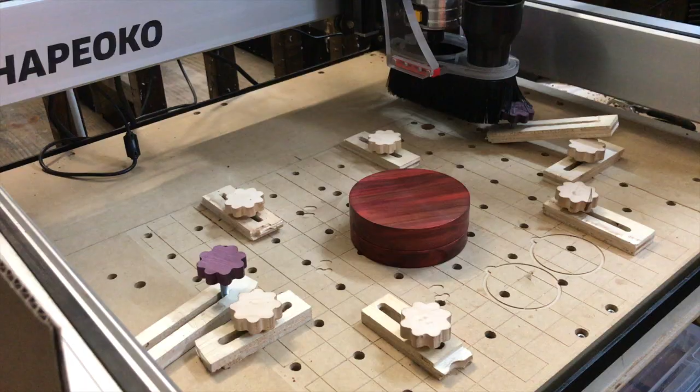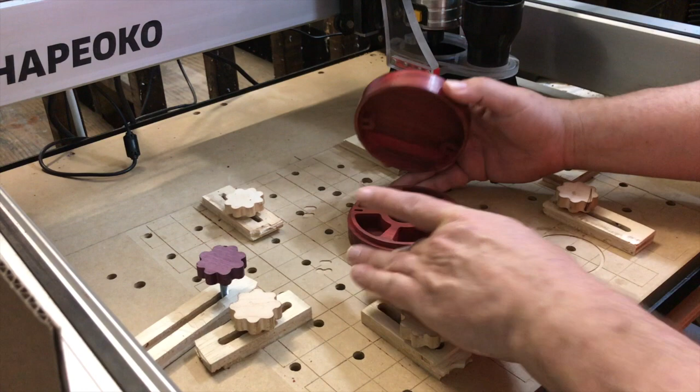This will be part 3 in the box series of videos. This time I wanted to cover a little bit on how to use the node editor, how to use subtraction, and also how to position magnets to hold on the lids of these boxes. So this time what we're going to create is a dice box for Dungeons and Dragons, because that seems to be what all the cool kids are playing these days.

You can also use these for jewelry boxes or for any other kinds of things. And I'll show you how to get the magnets positioned in here, mount those, and how to get these little pockets cut and spaced out correctly. And then in the end, we'll come back and we'll carve something really pretty on the top.

So with my original design, I knew I wanted something in a circular box. I've dealt with ones that are about this size before. This is about a little over 4 inches. It gives me a big enough box, but it doesn't feel huge and clunky. Each one of these is a ring approximately 1/8 of an inch in from the other. This will be our outside diameter here, our inner lip, and then the inside piece of the box here.

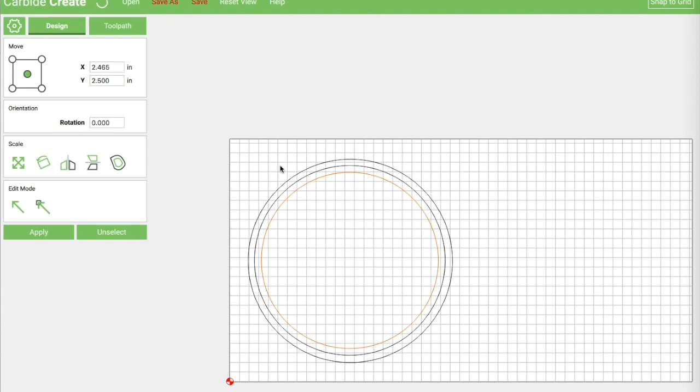Now, I knew I wanted 6 compartments in here, so I could literally just take these 1/4 inch slices like this and do them 60 degrees off from each other. And that gives me 6 compartments. And I wanted 6 compartments because there are 6 types of dice in D&D.

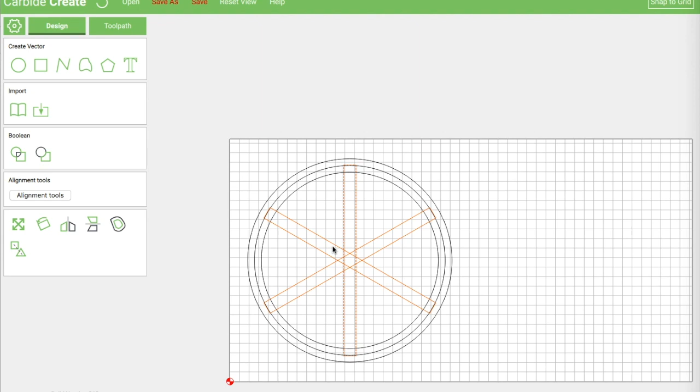I looked at this a couple of times and I felt like these were still a little small in here and there was a lot of wasted space in this area. So that's when I decided what I wanted was 5 compartments around the edge and then a circular compartment in the middle, so that I didn't end up with this wasted space here. What we're going to do now is I'm going to go ahead and kill these 2 right here. Delete those.

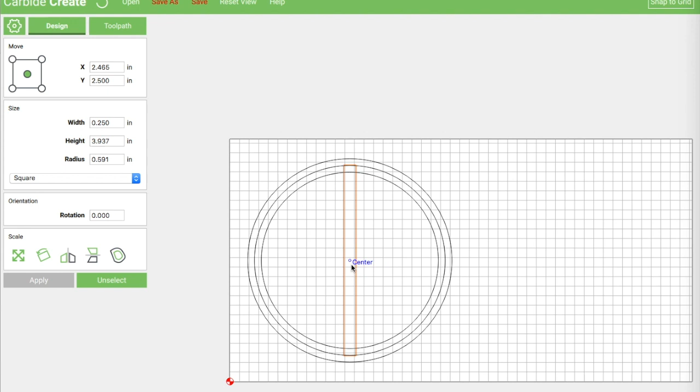Alright, so now I've got a 1/4 inch walled piece right here. I know that this is 360 degrees, good old high school geometry coming in handy. So if I'm going by 5 compartments, I want these to be on 72-degree angles going around here. So I take this one and I'm going to copy it.

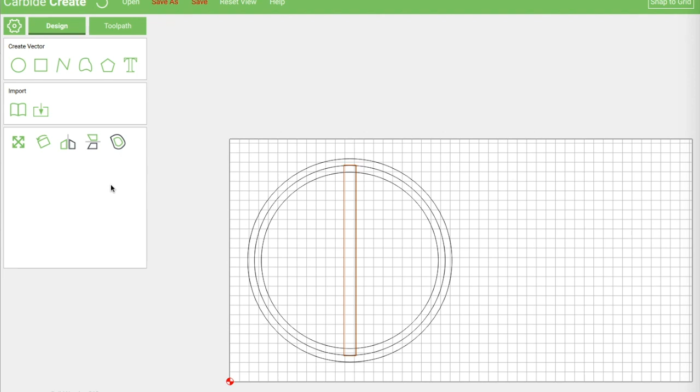Now I want to make sure that these are all spaced correctly. And one of the things I can do, you notice here I see these little points, midpoint and center. I can take the center of this one and drag it and it'll lock to the center of that one. And that way I know they're exactly where I want them to be. And then I can just take this one and make it 72 degrees from that one. And I know my second wall will be here, right? And I'm going to keep doing that until I've got my 5 compartments.

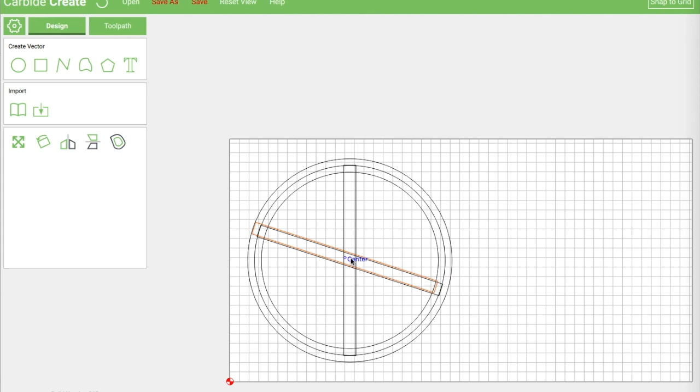Okay. So now you notice we've split this into a lot more than 5, but really what we want is every other one. This one, this one, this one, this one, and so on. But we also want these shorter. We don't want them going all the way across. So to start with, I'm going to use that fact that we can lock these nodes together to line up all of our stuff, right?

So I'm going to lock this one first. I'm going to copy it. And I'm going to go ahead and center it. And then I'm going to make it a little bit shorter. So we're going to make these about 1.25, 1.5. So now I'm going to take the midpoint here at the top and I'm going to lock it to this one, right? So now I know that's in the right spot. I'm going to delete this guy. Don't need him anymore. And I'm going to go on to the next one.

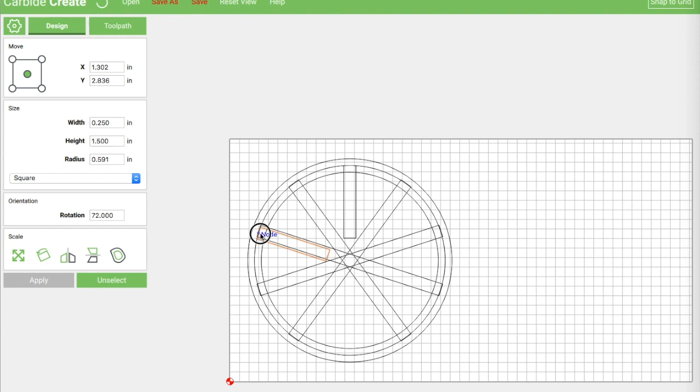Remember, the next one's not this, it's this one. So do the same thing, copy, center it. 1.5. All right, grab my midpoint. And I can get rid of this one. So this makes sure that each of these is in the right place and at the right angle.

Okay, so now I've got my 5 walls right here, and this gives me a nice big open space up here, and I'm going to use the space in the middle as well. But for right now, what I want to do is I'm going to go ahead and subtract these out so that I end up with the inner walls that I can cut.

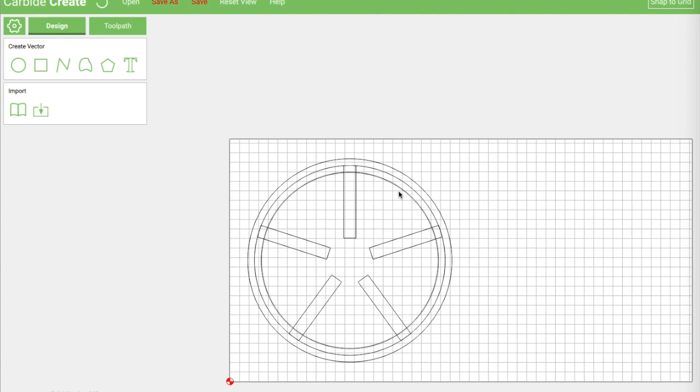So start by selecting my innermost circle. I'm going to break these apart. My innermost circle, select this guy because he's got his little dotted line around, so we're going to cut him out. We use subtraction, boink, and now he's out. And we're going to do the same thing with all the rest of these.

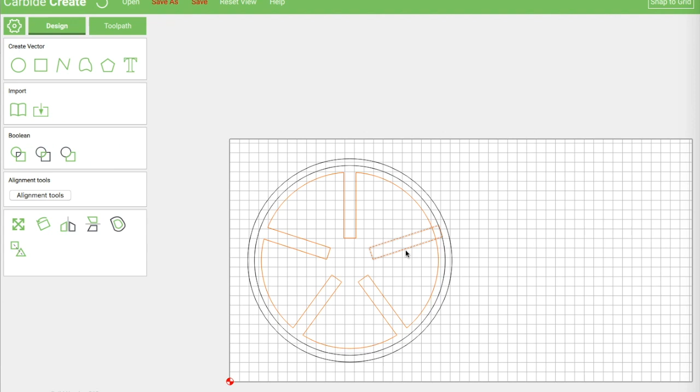Alright, so now we've got this kind of really odd shape here. So the next thing I want to do is put our circular pocket here in the center. So I'm going to go ahead and take our circular vector, I'm going to lock to the center. And I'm going to make this one about 0.9 diameter. Radius, sorry. Keep forgetting radius versus diameter. Then I'm going to take this, I'm going to do an offset. 0.25. Alright, and that'll be our center pocket.

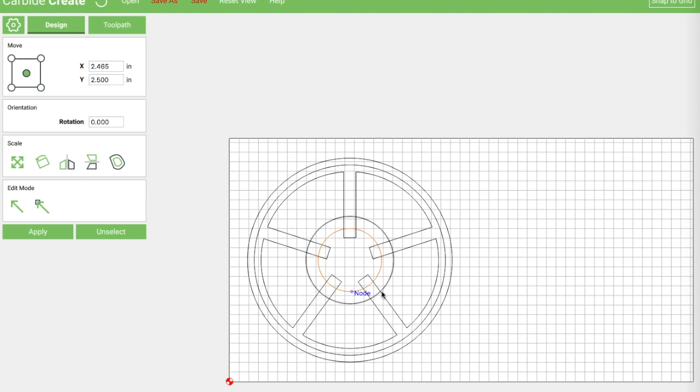Right? So now I want to take this crazy shape and I'm going to subtract out our center. Use the subtraction tool, bang. And now we've got our pockets and our center piece right there. So we should be good to go on that. The next thing we want to do is add the magnets in.

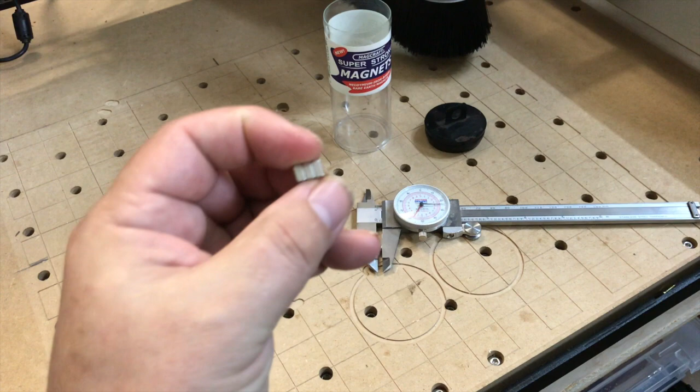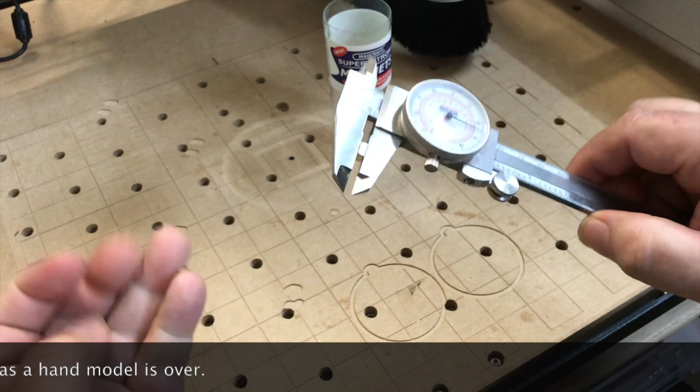Okay, so the magnets we're going to use are these little guys. They are made by a company called Magcraft. You can order them online from Highland Woodworking. They are about 1/4 of an inch square, and they come out to be exactly 1/8 of an inch thick. So we'll need to take that into account when we're cutting the slots for these.

Okay, so now that we know the size of our magnets, let's get those fitted in there. Go ahead and choose this. And I want to make this 0.128, a little bit bigger than the 1/8 inch of the magnet. 5, and I'm going to fill it. So now I've got this. And these are the size for my magnets, right?

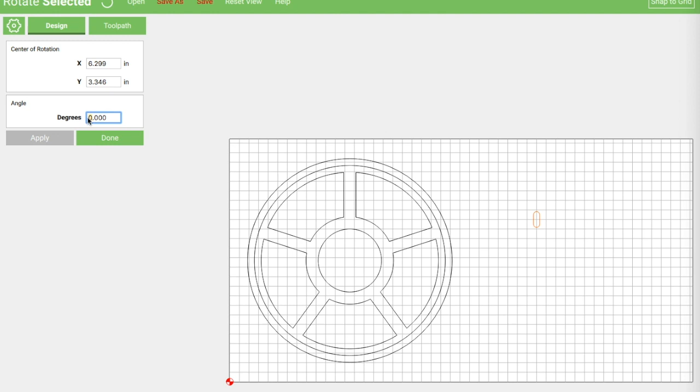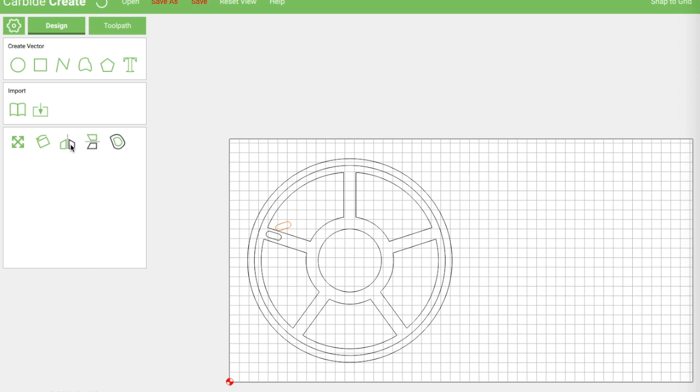Now I'm going to go ahead and make this one 72 rotation. And then I should be able to fit it right over here. I'm going to turn off snap to grid so it doesn't try and pull it in one particular direction. Okay, so I'm going to put that one there, copy, and flip. And this one can go over here.

And I find sometimes it's helpful to zoom in on these. Positioning. That's close to center. And this is close to center. Okay. Now you'll notice that there's not a lot of material here. So this could prove problematic when we're trying to put those magnets in. You can wind up busting out the wood.

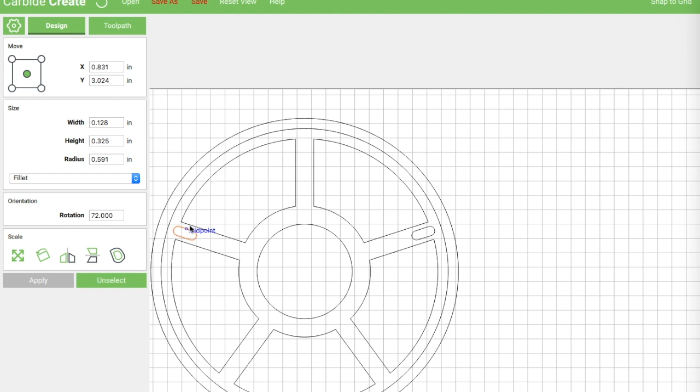You don't want that. So what I want to show you next is something called a node editor, which is built in. I can come over here and I can select one of these. And now I get to see all the nodes that make up that shape. And I can zoom in and I can select a node. I can tell it delete. Notice that gives me a little more room. Delete. Delete. So now I've got a little more space.

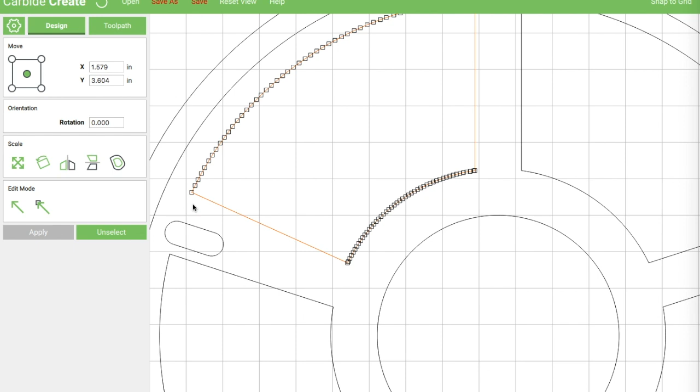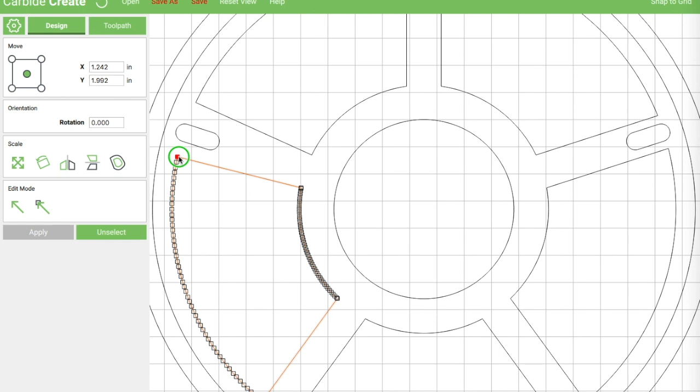If I reset my view, okay, that is cool. That gives me plenty of space. And I'm going to go ahead and do the same thing to this one. Delete. Delete. Delete. Alright, unselect, reset. Okay, so now I've got a little bit of a wider shape.

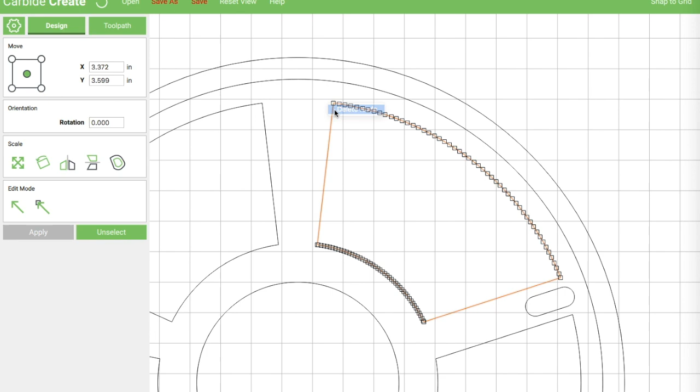It doesn't detract too much from the room that I have in the shell, but I think I want to make all of these consistent all the way around so that they've kind of spread out at the top like this one. So let me go ahead and do that. So now I've got this, and that gives us the basic shape for our bottom piece. Now we want to create our top piece.

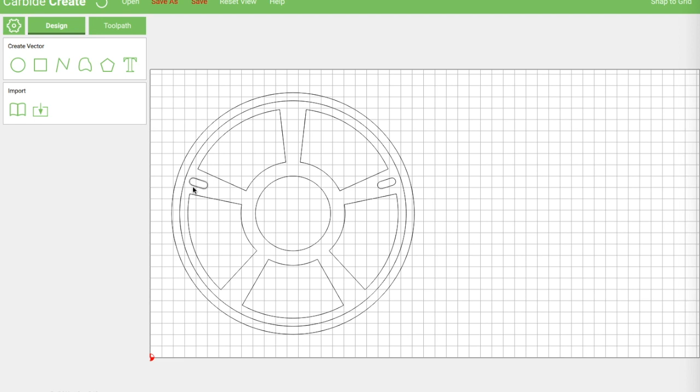The critical thing to remember about the top piece is you want these magnets to line up exactly. We don't necessarily need these pieces right here, so we're going to make our top piece completely open. So I want to select these two, the magnet, and this other magnet. All right, now I've got those. Copy. I'm going to group them.

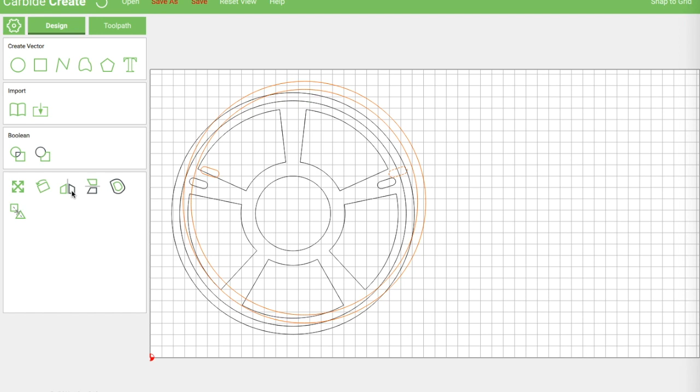And the other thing that's important to remember to do is flip them. I want to go ahead and flip them this way because remember our box is going to sit together, right? And that ensures that those magnets should line up when they come together. So now what we need to do is go ahead and break this apart again.

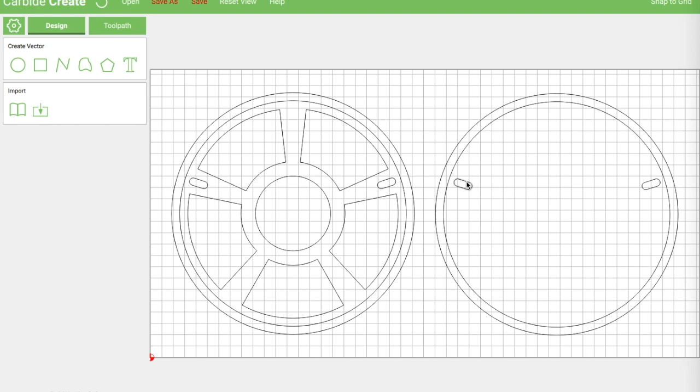I'm going to select this guy. So this is our inner wall, right? This should line up with this piece over here. But I need some place for these magnets to fit in. So what I'm going to do is I'm going to come here and I'm going to say I want outside. Yeah, I can live with that. Okay, so I want to do that, and then I want to do the same thing for this one.

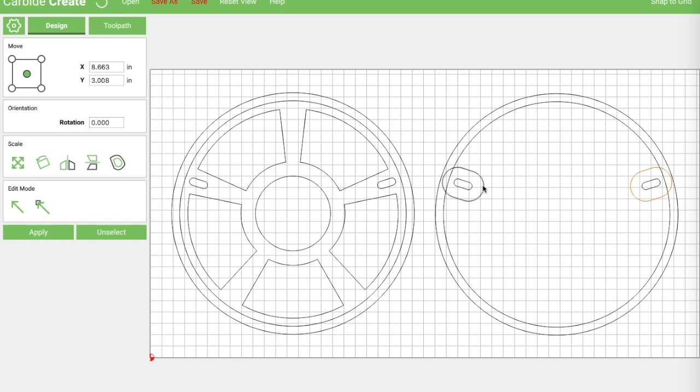Okay, so now I've got these pieces here that allow me to put some wood there. Next thing I'm going to do is I'm going to duplicate this guy. You'll see why in just a second. Copy. And now I need to cut this guy out. Subtract. And this guy out.

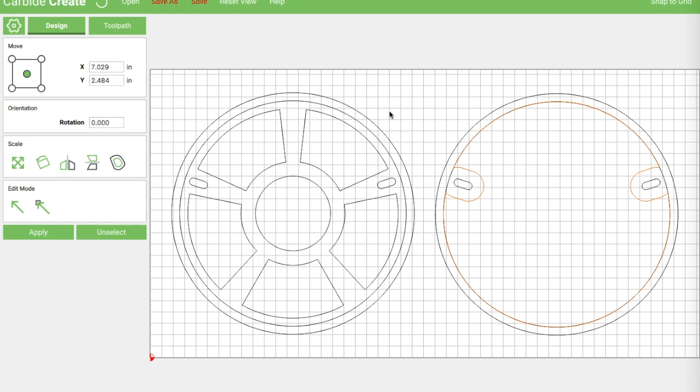Okay. So now I've got a complete outer ring here, right? This one goes all the way around, and that'll be our inner lip. And then slightly down from that, we're going to cut this whole area out around these as our pocket for underneath.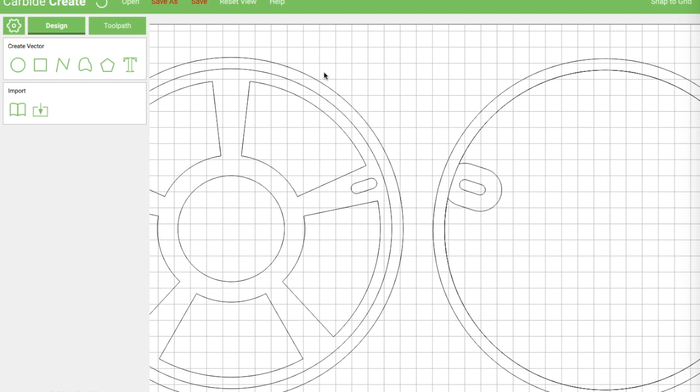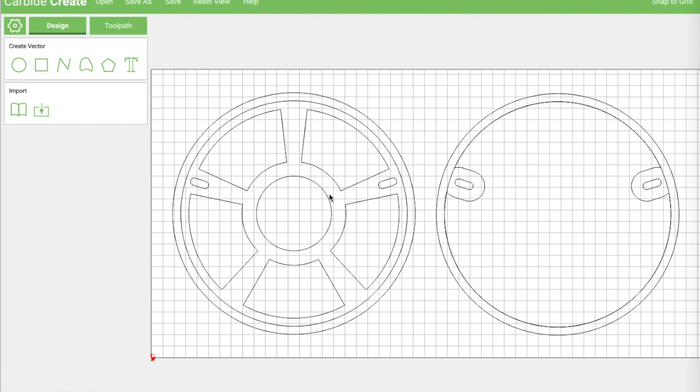Okay, so the next part is figuring out our tool paths. This is going to be a little tricky because of two things. For one, we're going to use an 1/8 inch end mill to cut these magnets out, but for everything else, just to save time, we're going to use a 1/4 inch end mill. So we need to do a tool change in between some of these things. We also need to be really careful on our order of operations so that we don't have to change tools back and forth. So the first thing I want to do is cut the magnets.

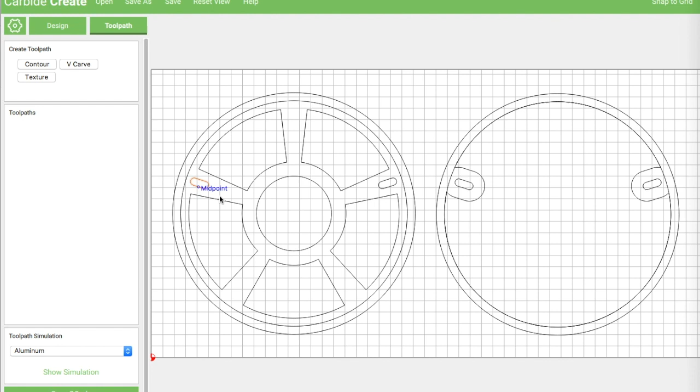And in order to show you how this works, I'm probably going to flip back and forth a little bit between the box itself and the design work. So we know our magnets are about 1/4 inch deep, and I'm going to go ahead and cut these two first. And we're going to do 1/8 inch end mill. Leave the speeds, they're fine.

And we're going to cut these just a hair deep, so 255. That gives us a little bit of wiggle room. And they should fit in there just nice and snug. And we'll leave those inside. And I'm going to call this bottom magnets.

Okay. Now, as we said, for our top magnets, these are going to be in a slightly different plane, right? So they're going to be further down. They actually need to be a little bit deeper than what we had before. So if we calculate what our bottom area of this is going to be and what the bottom of the magnet would be, we're going to use our 1/8 inch bit again, and we come up with 465. That should be our depth for that, and these will be our top magnets.

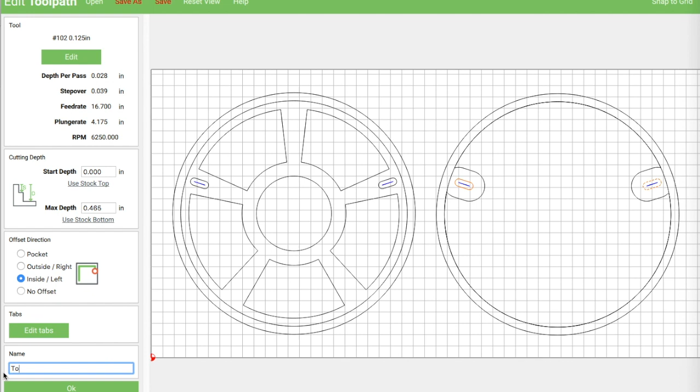I'm going to go ahead and save the G code for that. And I like to label these with the bit that I'm using. I like to spell it correctly too.

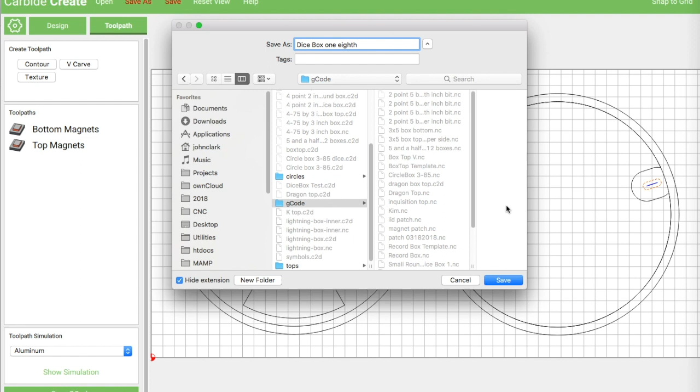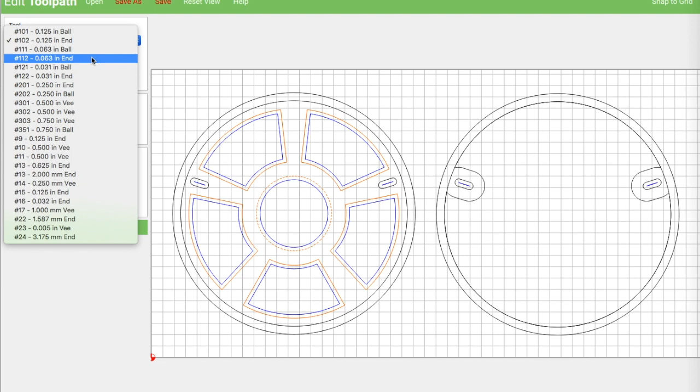Now we need to do our 1/4 inch passes. Now, like I said, this involves some dealing with different planes here. I'm going to go ahead and disable both of these for right now so that we can go ahead and export the 1/4 inch. Let's do the pockets first. And this is going to be a 1/4 inch end mill. And we're going to cut a pocket. And my pockets are going to be 63, which should leave us about a 1/4 of an inch on the bottom. So let's make those bottom pockets.

I also need to go ahead and cut the lip for this, which would be this piece. And that one's just going to be an outside contour. That'll give us our lip. And that one is going to be a little less than a 1/4 of an inch. So just go ahead and make it 2/10. Outside. Bottom lip. Okay. Alright, now let's switch over and look at our top.

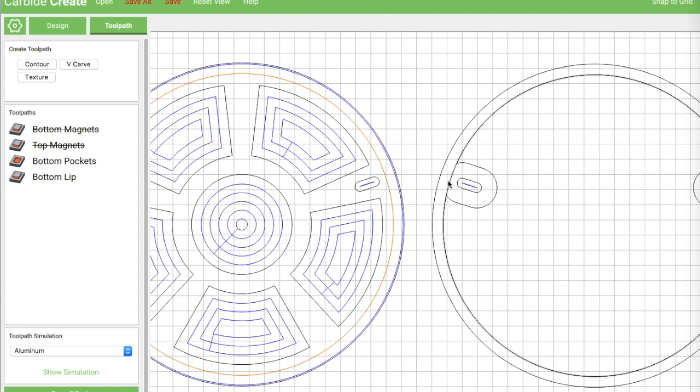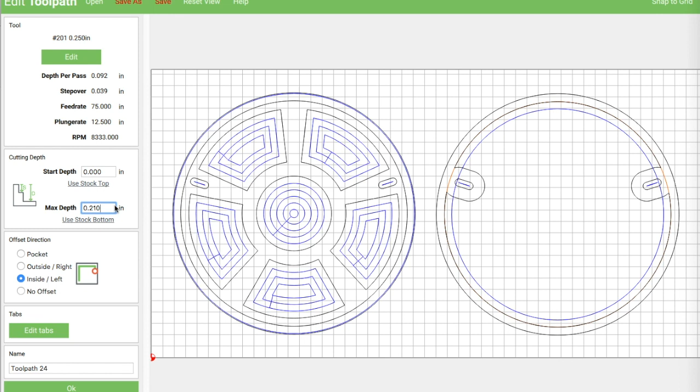So for the top, there is a circular pocket that we're going to use to get these down to where it'll fit flush with this. So I need to select this guy. Right, this is our complete circle. And we're going to pocket him. And his pocket should be roughly equal to the one here. I'm going to go ahead and make it a little bit deeper, just slightly. Because I find sometimes, like I said, it's good to have a little bit of wiggle room. Okay, and we want to switch this from inside left to pocket, right? And that's going to create just a shallow pocket that'll bring these down.

Next, we want to do this inner piece, right? This is the one that's going to go all the way down to the back, right? So this one, we're going to do another pocket. Same 1/4 inch bit. This one is going to go down to 0.63, which will leave us a 1/4 of an inch of thickness here so we can do our V carving on the top.

The other thing though is, since we've already cut away some material with this circle, we can start this one a little deeper, right? So go ahead and start this one at 210, which is where this first giant circle left off. Again, we want to pocket that, and that one we're just going to call the full pocket.

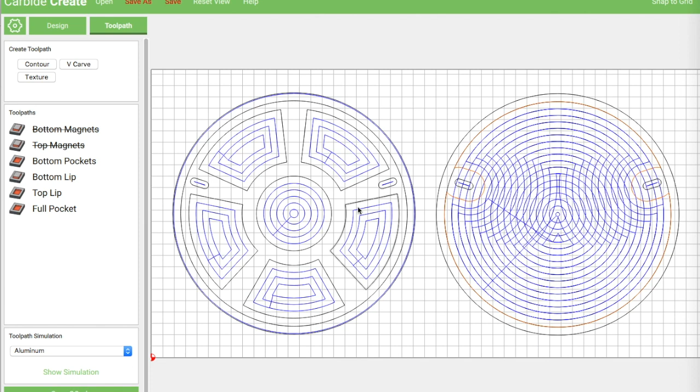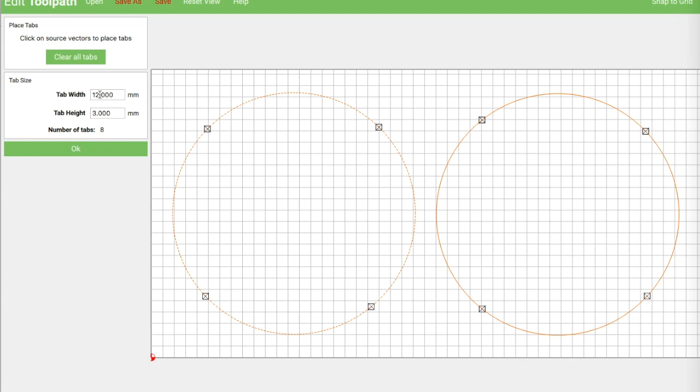I wouldn't add them right here because they might get cut out at that point, but 4 tabs is generally good for this, and I like to put them at the corners where there's a lot of extra stock. I tend to shave mine down a bit, just a habit. Alright, so that's got those pockets as well. We're going to call this cutout.

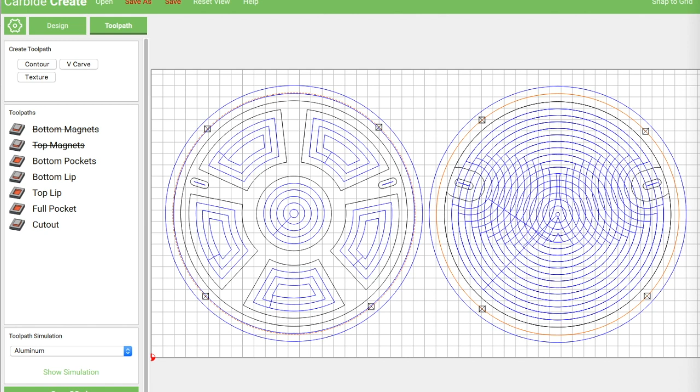Alright, now this is all of our 1/4 inch operations. It's always a good idea to kind of mouse over them and make sure that they seem to be cutting what you think they're cutting. Make sure that your order of operations makes sense. Alright, and we're going to save that G-code out. And we called that last one Dice Box 1/8, so we're going to call this one Dice Box 1/4.

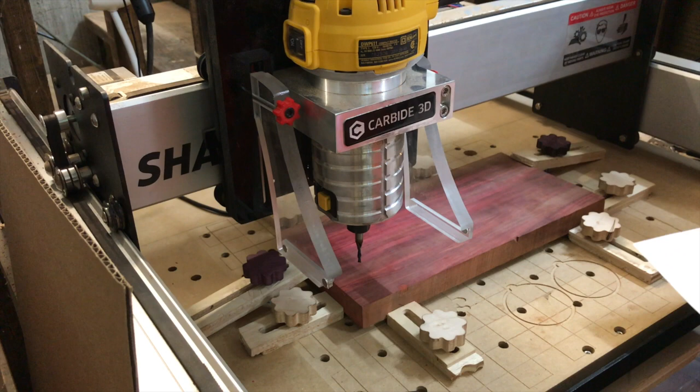Okay, that's got that. Okay, so remember, we're going to cut this box in 2 passes. We're going to do one with our 1/8 inch end mill that I've already got hooked up right here, and then we're going to switch to our 1/4 inch and get the rest of the stuff out. So what I need to do first is go ahead and zero this out. Okay, once that piece of paper is in there tight, I know that that should be 0. And now we're ready to get started.

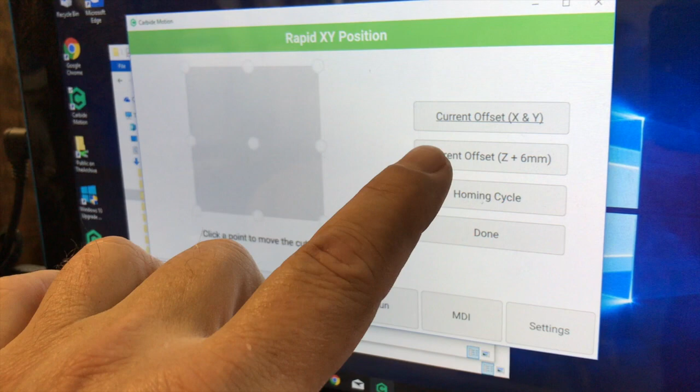Okay, so now our little pockets for our magnets are cut, and I have the 1/4 inch bit chucked in, and we're ready to do our second pass. Now in order to do this, remember we've changed the bit that's in there. So I need to come over here, and I'm going to jog this guy, do rapid position, current offset X and Y, and I'm going to drop it down within 6 millimeters.

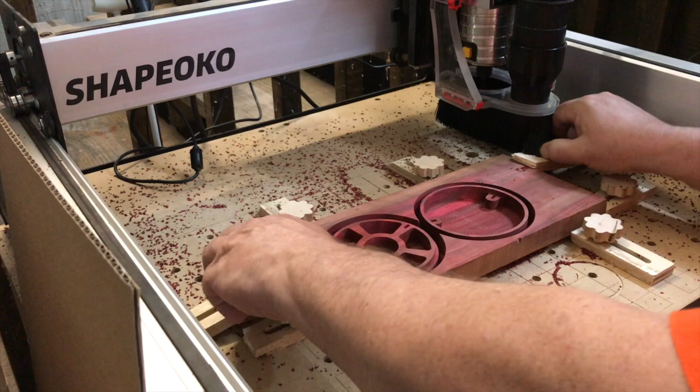Now that returns us to our original position, and we want to keep that X and Y. The only thing we're going to do is readjust that Z axis, and that will make sure that we're in the same position we need to be to start our second cut. And again, we're just going to jog this down until that paper catches, and then we'll know that we're at 0 for our final Z axis. Okay, and here we go. I got a little bit of cutting out to do on the bandsaw, and then we should be ready.

Okay, so now we've got our two sides of our box, and they fit together pretty well. We're going to go ahead and put the magnets in, and then we're going to carve the top. So the first thing we want to do with our magnets is make sure that we've got a polar matched pair, right? So we're going to stick them together like this, and then I'm going to take a Sharpie. I'm going to mark the outside of each one of these so that they're black. That way I know the black piece is what goes down into the wood, and I will have those magnets attracting to each other, not repelling.

You're going to screw this up once and it's going to make you really unhappy, so definitely mark them each time. So now that I've got this pair marked, I can take it, position it, and shove it down in there using its mate. And I want to get it not quite flush, because I'm going to use these to squeeze together to get them flush. Now that one is going to match up with this one, and remember I want that black piece going down, so I'm going to put that in here.

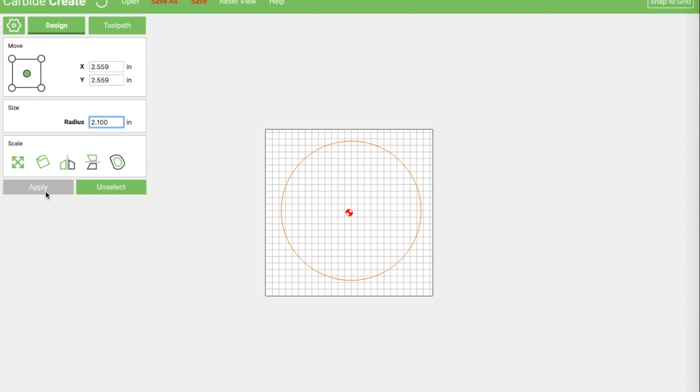I'm going to go ahead and make myself a circle here. And I'm going to make that the size of my box top. This will just be a reference to kind of keep me in bounds on that. And one of the things I'm going to do first is I'm going to create a quick second circle, select the two, alignment, and center them in the stock. Right. Okay, that means my circle is in the middle of the stock. Let me get rid of this guy. That's where my box top needs to fit, is in that section.

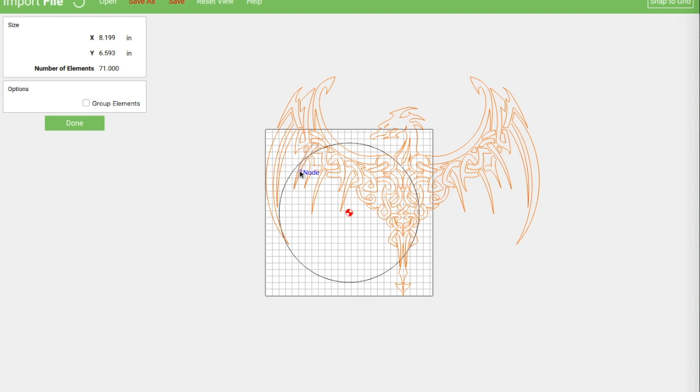So I'm going to go ahead and import an SVG image I've already got. This is one that I purchased from Shutterstock that I like a lot for these kinds of boxes. Alright. But one thing you'll notice is when I click away from him, I've got a bunch of pink looking lines here. Some of them are black and some of them are pink. Now, if we zoom in on one, we can see what the problem is.

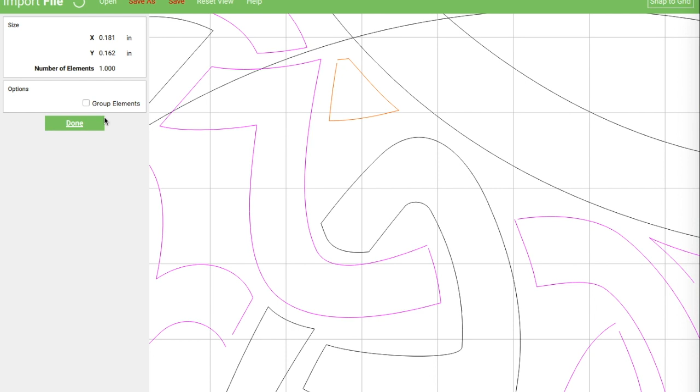This particular path isn't actually closed, right? And that's where Carbide is coming into problems. This one here is open there, that one's open there. Sometimes the paths aren't completely closed when you convert from the SVG. So what we want to do is come back over here. You notice when I select this, I get my little node editor over here, and I get this guy. This guy will join my paths, the most convenient path there. That one is now black and ready to be V-carved.

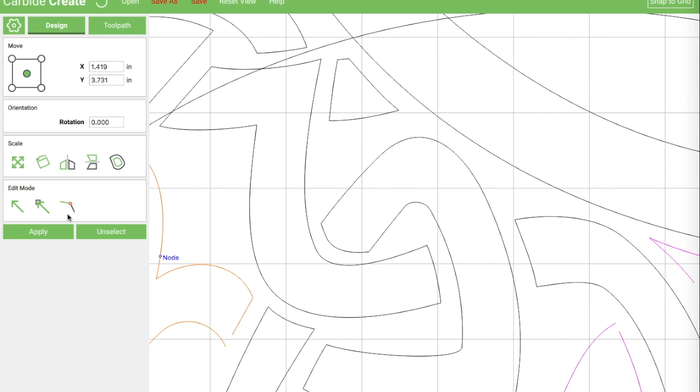And I just need to do this with the rest of these. And I'm going to give you a break from watching me do that because boy would that be tedious, but if you're zoomed in, it doesn't take very long to do. Okay, so that's got him. Now I want to make sure that I go ahead and reselect everything. I want to deselect my circle and then group them. Okay, so now I've got this guy.

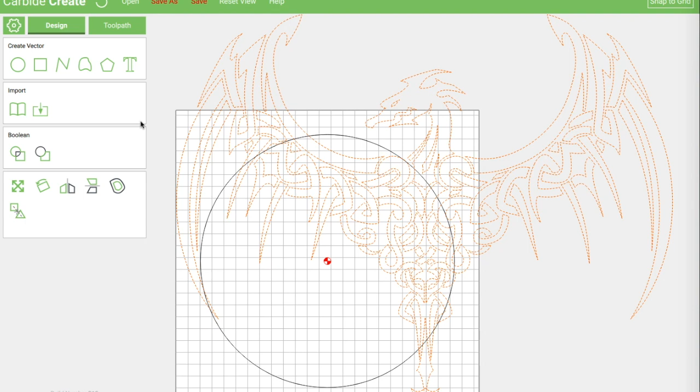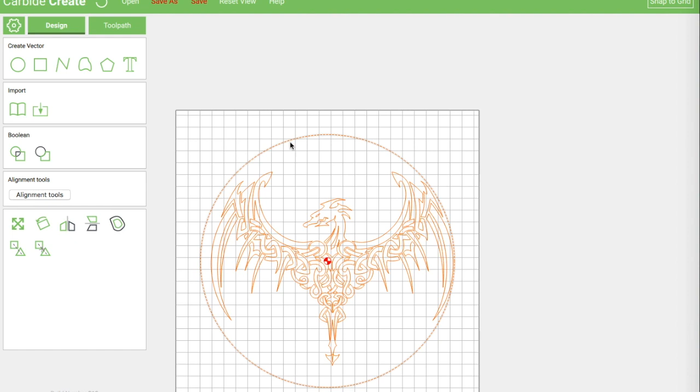He's all selected. And I'm going to scale him down so he fits on top of our box. And let's make him about 4 inches wide. See how that works. Alright. Click this guy. Center him. Probably want to bring him down. So let's see what happens if I do that. And bring him in like that. Okay. I think that's got him.

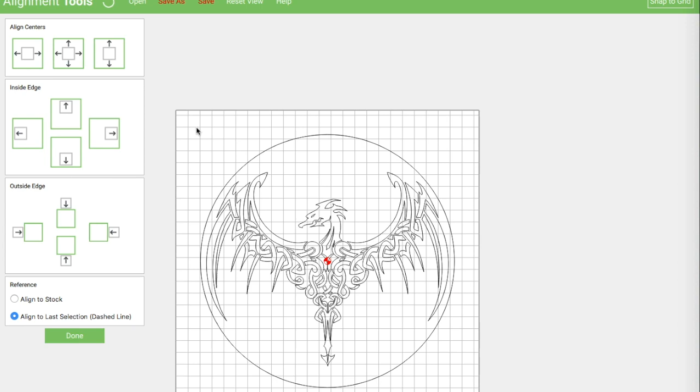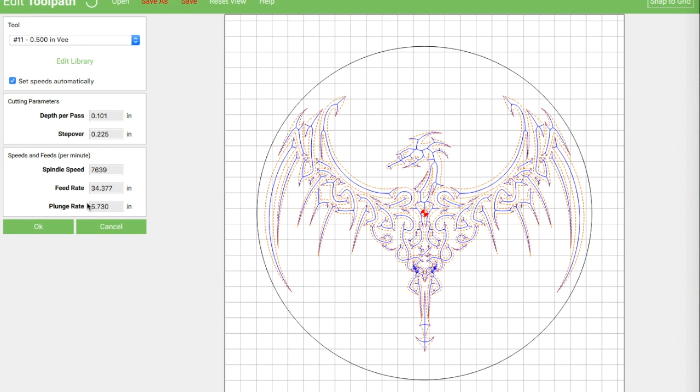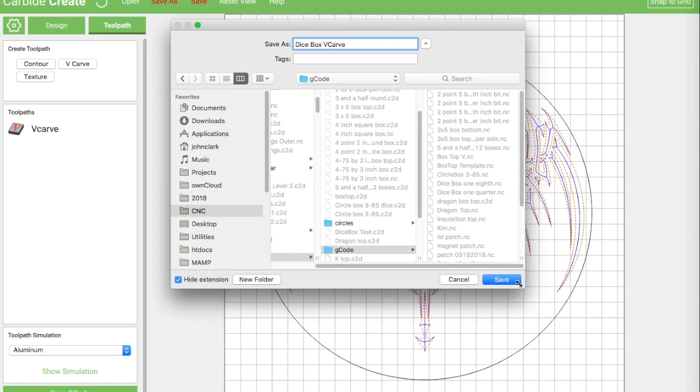Alright, so now we've got the outside of our box just as a reference, and this will be our V-carve. So I'm going to go ahead and select him. Do a toolpath, V-carve. I'm going to choose this is my 60-degree end mill. Should give me a little bit better definition. I'm going to choose OK. V-carve. Alright, and we're going to save that G-code as Dragon Dice Box V-carve. Alright, so now we've got that saved.

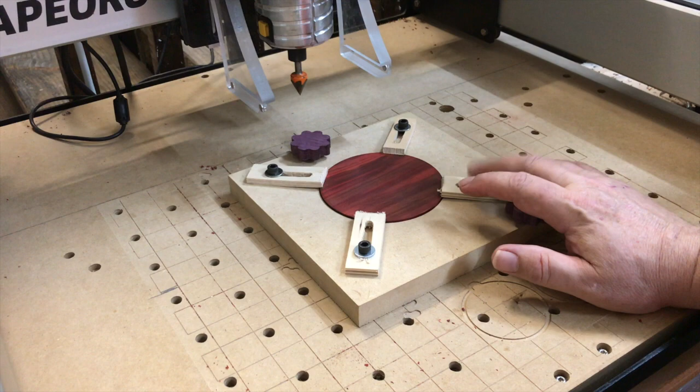So this is one of our centering jigs like I created in the last video. I'll put links down in the doodly-doo just to make sure that if you haven't seen that, you can review it when you get a chance.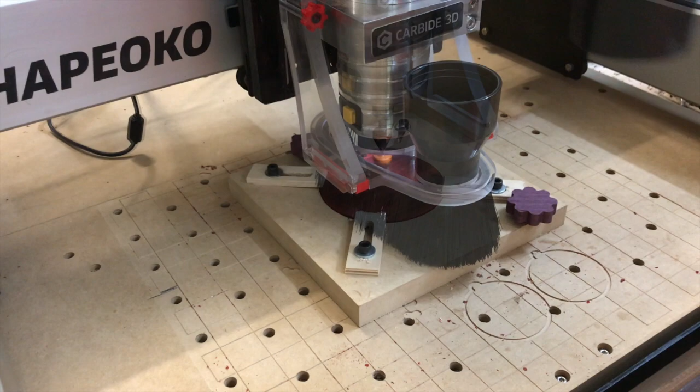But the basic idea is this is just a piece of MDF bolted down in the center that lets us use the machine's idea of what the center of the wasteboard is to make sure that we center the design correctly on our box. And if I go to rapid position and I hit center, I know that we're in agreement on what center is. And now all I have to do is set my Z-axis and we can go ahead and carve. And there we have our dragon lined up perfectly on the top of the box. Let's do a little bit of cleanup and a little bit of finishing and we should be done.

So this is our finished box. Couple of coats of acrylic on it, magnets in place, and ready for somebody to use.